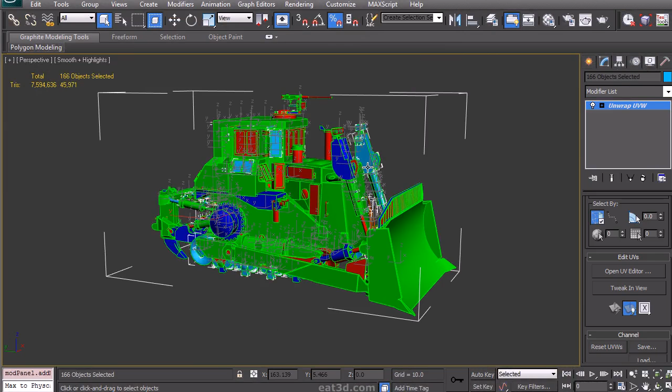So baking ID is done, but before I jump in completely, I'm going to do one final checkup of the UVs just to be sure. Might adjust a few more things. So I'm going into these materials here, and I'm going to pick a quick checker to see if everything is matching up in terms of tiling.

I just want to see what the pixel ratio on some of these parts will be. I'm going to assign this. It looks really tiny. There's some moiré effects. I'm just looking at the pixel density. Again, I've set this to 2048 by 1024. So every square of the checker represents 4 pixels. So it looks pretty good. I'm not too worried about the density.

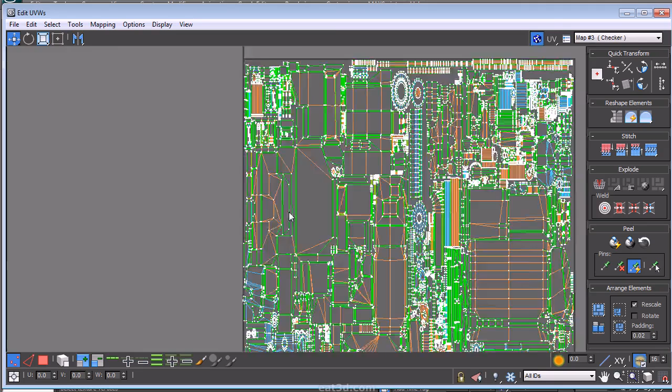So I'm going to open up the editor, and annoyingly it forgets about your 2:1 layout, so you have to go back in and change that around. It is not really showing me the size of the checker, so I'm just going to manually go in. As you can see, it's capped at 2048, so I can't really go bigger, which is a bit annoying.

Looking at tile bitmap, if I can get it to work like that. And it's really refusing to show me the actual thing at its pixel density. So what I'm going to do is just reduce this a bit. I think it doesn't really like working with such small sizes of checkers, and there we go, we can see this. So yeah, this sort of looks okay.

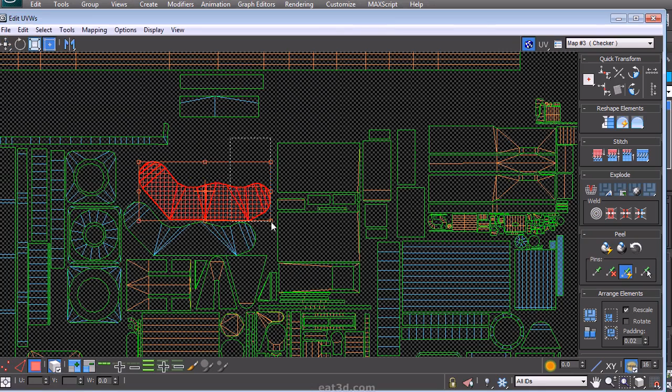Again, see if I put this back to 1. It's not actually using this tiling thing, which is a bit annoying as well, but at least I can change the brightness so it looks a bit bearable to look at. So that's done. So we're going to have 8 pixels per part here, and what I mainly want to do is space certain things that have been packed together perhaps a bit tight, space them out slightly more, just to make sure that I don't have any problems with that when going for the actual baking.

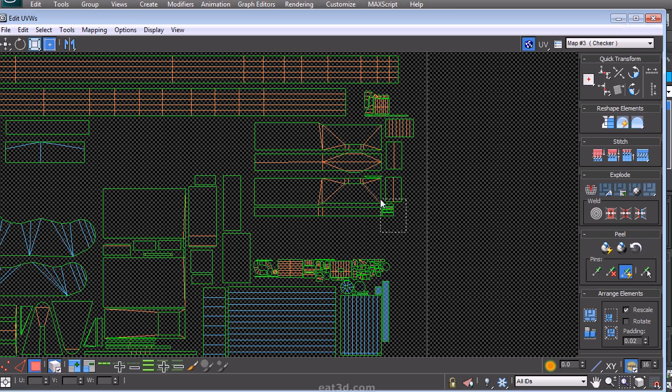The only issue that we really have here is that my UV editor is running a tad slow because of the complexity of this mesh. It seems like 3ds Max doesn't really like meshes of this complexity being unwrapped. So I'm mainly just going to move some parts out here and there. Like, I think it's important that I give the gun a little bit more breathing room, because it's one of the more visible, detailed pieces. Just going to grab some of this, move it around.

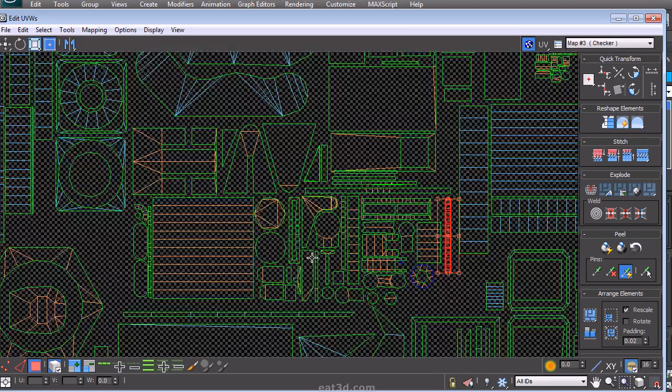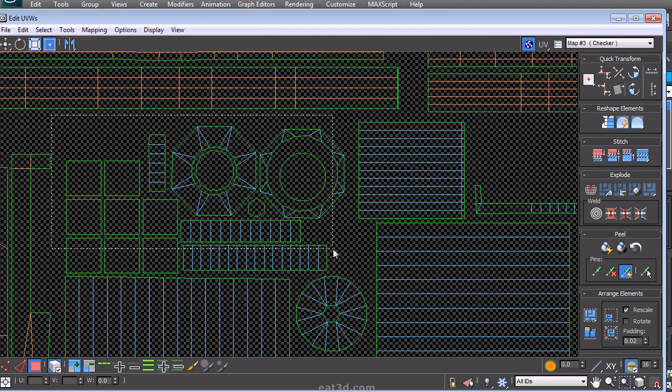We can really keep doing this for a very long time. I'm not going to try and spend too much time on it. It really is up to you to do this. This also sort of depends a bit on texture resolution. I'm not super worried by it, but I think it doesn't hurt for certain pieces to do this. See, some of these also look okay. Just utilizing the space we have to make sure that things are not sitting closer together than they should. Which is a bit of a difficult thing, really. You've got a ton of stuff to pack in there, but once you've settled on an actual scale, you need to make sure you're actually working with that.

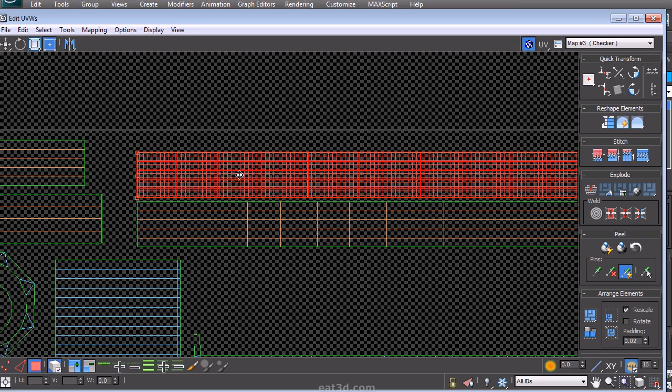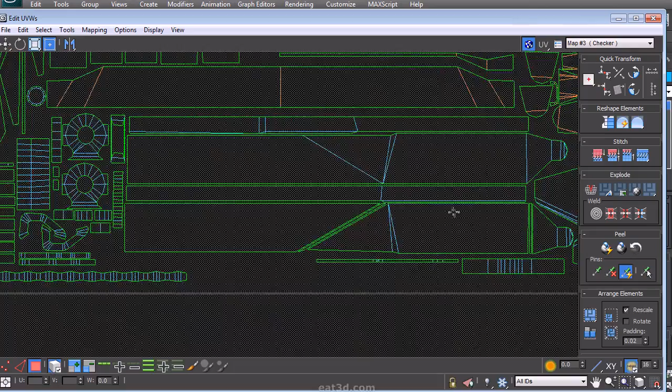The spline piece, which I've packed up here, I'm going to move those around. These things also a little bit. So I'll move that one up. So we can keep going for a while, just skipping ahead now and then. I'm slightly annoyed by how slow Max is working. But I think you're starting to see the point of what we're doing here. The main point is just increasing the padding value between things slightly more. In general, a lot of these parts are looking okay. But that should be it, and I think we can dive into our test bake in the next video.